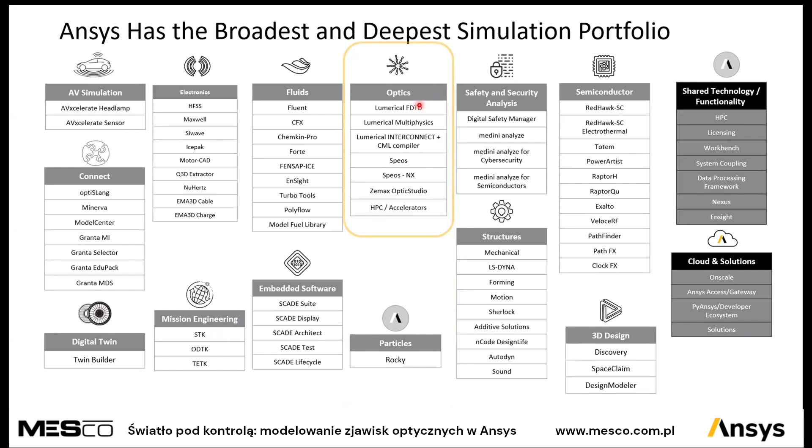But for today we stay focused on optics. We are looking at a nanoscale technology tool, an optical design tool, and a system tool, to go from nanoscale design to complete system validation in edge case use cases.

So what are now the challenges? If you are working as an optical engineer, a photonics engineer, or if you're a student starting to think about becoming an optical photonics engineer, you will have different challenges. But you also have an advantage: looking at optics, looking at photonics, this technology is everywhere.

Everywhere you're touching a product, mostly optics is inside. You can look on outer space engineering, telescopes design, daily use glasses, smartphones, rocket technologies, augmented reality glasses, medical devices, cameras, fiber coupling, sensors on industrial production lines, automotive lighting, autonomous driving, head-up displays, cockpit lights, satellite communication, microscopes, laser pointers, space observation. All the topics are needing optics, and the usage of optics photonics is increasing massively.

If you're thinking about a new job as a student, starting in optics photonics, you're welcome. The market is searching for you and needing research partners to deal with new technologies. So stay focused if you like to start your job as an optical engineer.

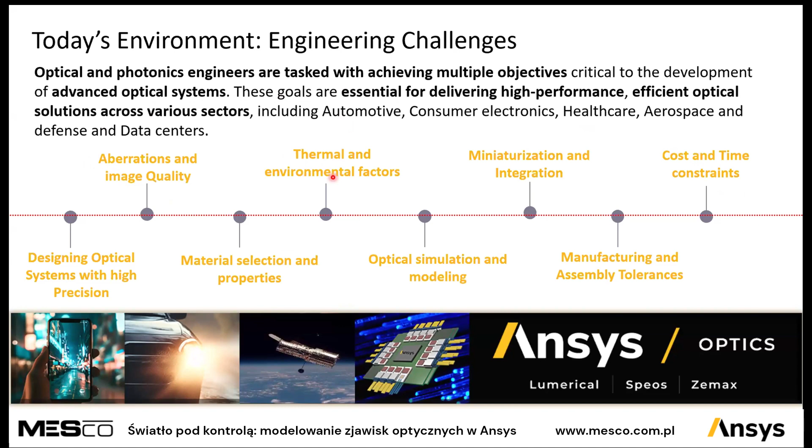For each development, the costs and timing of a new product or optimizing an existing product is mandatory to track, because a product needs to be fast on the market to increase business outcome, but it also needs to be fast and accurate. All these challenges need to respect the optical design, whether on automotive, consumer electronics, space observation, or data communication. All the technologies have the same challenges.

If you're talking about optics at Ansys, we're generally talking about a specialized wavelength spectrum, to find a separation from electromagnetics to high frequency. In optics and photonics, we are talking about infrared, visible light, and ultraviolet range, from roughly 100 nanometers up to 100 micrometers. We are talking about optics as a physics-based simulation, looking on a component. All that simulation tools can add to each other, to look at the system and measure performance of an optical design in our optical tools, working inside the systems, in virtual prototyping, in edge cases and weather conditions.

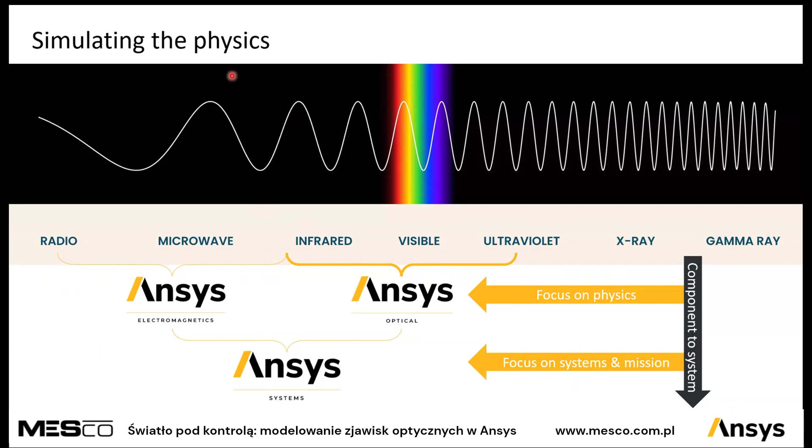Looking at the wavelength spectrum, we are providing 3 fundamental software solutions. From a first nanoscale solution called Ansys Lumerical, we are providing a photonics tool, which is using the Maxwell equation to simulate the transport and behavior of radiation with respect to the wave behavior. So, looking at light, looking at radiation, you can validate it as a particle or as a wave.

Especially if you're talking about nanoscale designs, where designs are equal to or close to the wavelengths of interest, you need to respect the wave behavior of radiation, to design nanoscale plasmonic patterns, waveguides, sensors, RGB displays for smartphones, anti-reflex coatings. For all that, we need an FDTD solver to validate specialized optical elements like diffraction. We like to detect and use these effects with such a tool. For all nanoscale technologies, we provide Ansys Lumerical.

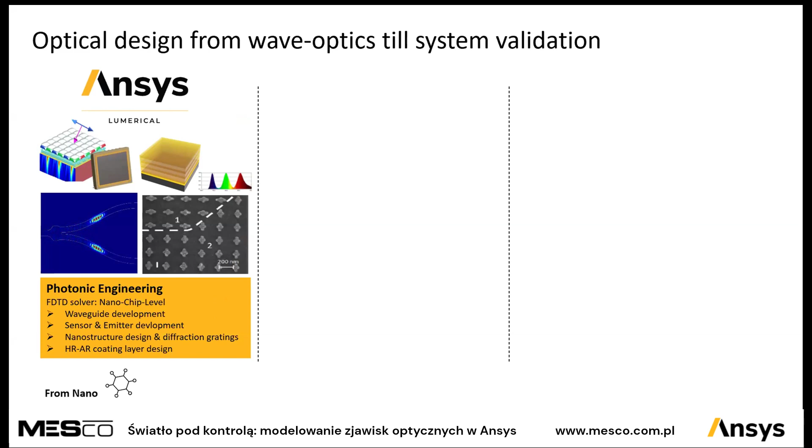Next step, from an FDTD solver to a ray tracing solver, which simulates light radiation as a vector hitting a surface, which will be absorbed, transmitted, or reflected, we provide Ansys Zemax. Ansys Zemax is a tool focused on optical design, camera lens systems, but not only the design of a simple lens, a lens stack full of freeform lenses. It's not only the design, it's also the optimization, analysis of tolerances of the lens itself, but also of the optomechanical systems, to provide a manufacturable product, a product which is good for the tooling, matching with the tooling, and providing the customer performance.

Last but not least, we have Ansys SPEOS. SPEOS is a lighting tool and system tool.

This tool is also a ray tracing solver like Zemax, looking on a particle which hits a surface, but it's focused on lighting technologies. This design of optics is a little bit more simple. We are using freeform reflectors, ellipsoid reflectors, light guides, and pillows on optics to spread the light, which is mostly used in automotive and general lighting.

The advantage of Speos is that it is also a system engineering tool. That means you can put your Ansys Lumerical information, for example in nanoscale meta lens design, into an optics design of Zemax, and in Speos we can validate the complete system, how the system works, how the sensor performance looks like under critical ambient conditions. All three fundamental solutions are able to match the needs on a component design depending on the industrial usage of our customers or the system responsibility of our customers.

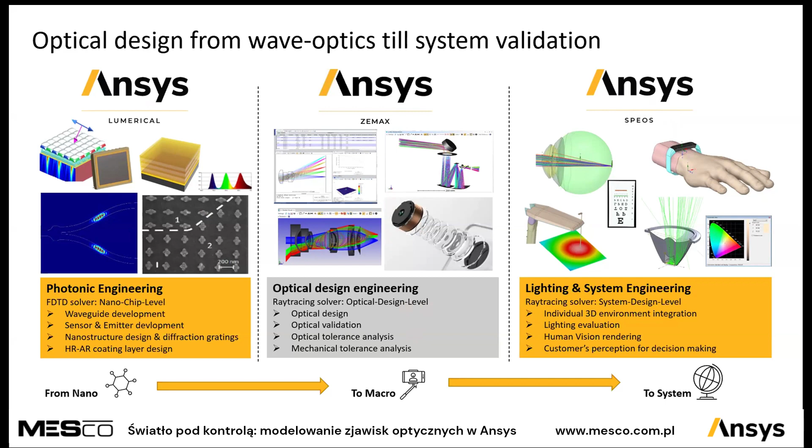That means we have a very valuable bridge we can close with our portfolio. We can build a bridge at Ansys, only at Ansys, to provide a nanoscale photonics FDTD design into a Monte Carlo ray tracing solver like Speos and Zemax. That means we can design nanoscale plasmonic patterns numerically and transfer the near field information of that simulation into our Zemax and Speos to validate how a nanoscale design has an effect on readability and contrast, for example, of a head-up display.

We can design optical coatings numerically, interference coatings, anti-reflex, high reflex. Then we can transfer the coating information as a library material into Speos and Zemax to validate the performance and look on the residual reflex by visualization.

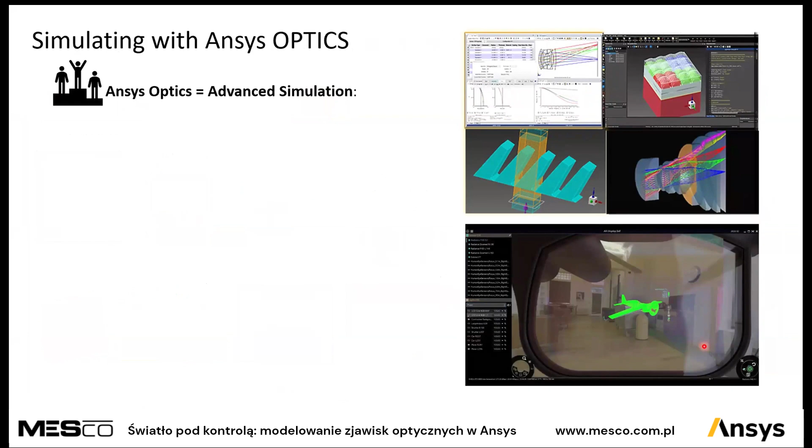So, and this is unique: this bridge between nanoscale design and macroscale designs and macroscale system validation is unique at Ansys. That means working with Ansys Optics means for each of our customers and each of their engineers using advanced simulation.

Why advanced simulation? Because we are providing multi-physics integration. We can use our Ansys Optics to predict how an optical system is working after multi-physics effects like thermal heating and mechanical stress. We can provide visualization, real physics-based visualization. That means we can predict to 99% how that product looks like and where the weakness of a product is.

We are providing GPU capability, HPC capability. Looking on complex designs, GPU, HPC, cloud systems are mandatory to decrease the simulation time to a minimum. We have a faultless data transfer, as discussed in the slide before, between FDTD solver and Monte Carlo ray tracing solver. And for sure, our Ansys Optics bundle has full integration into the complete Ansys ecosystem, to mix it with the mechanical simulation, to mix it with the fluid simulation.

So, for that portfolio, three tools for one solution: optical design, respectively photonics design. You will have, or you are knowing, different challenges, and some of them we'd like to discuss with you.

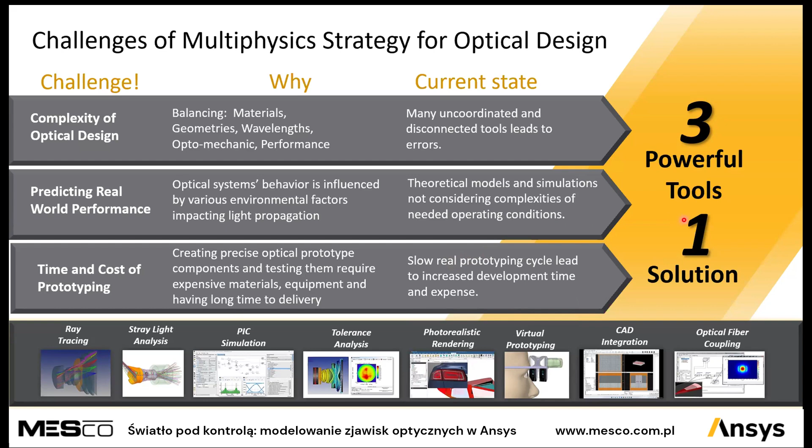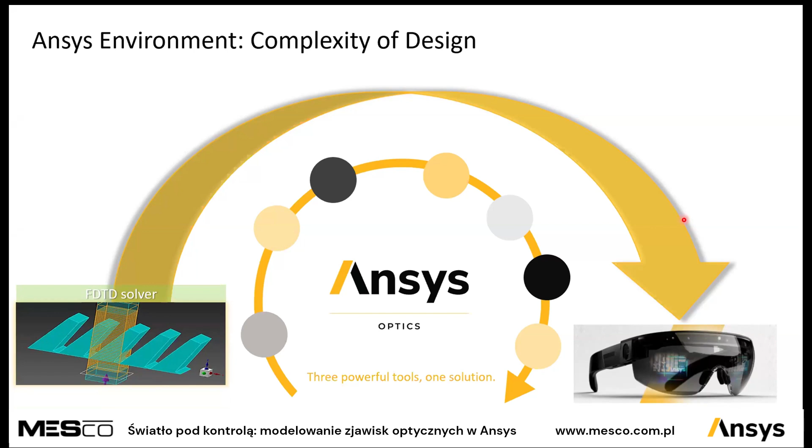By virtual prototyping, they could save a lot of money currently spent on real prototyping. Now let's take a look at the Ansys environment for design complexity. You have to balance materials and technologies. Looking at augmented reality glasses as an example, Ansys can provide the bridge from photonics to optics to multiphysics and GPU.

Designing augmented reality glasses needs nanoscale diffraction gratings, a ray tracing solver to simulate the optical projection from the camera, and multiphysics protection since AR glasses work under different scenarios and weather conditions. We can use our tools for optimization, to reduce the package size and increase performance.

We provide tools for human vision rendering, meaning you can look at the performance and validate whether the customer accepts it, how the images look from different points of view and different focal points. All of that is powered by GPU to make it quick, but also accurate and trustful.

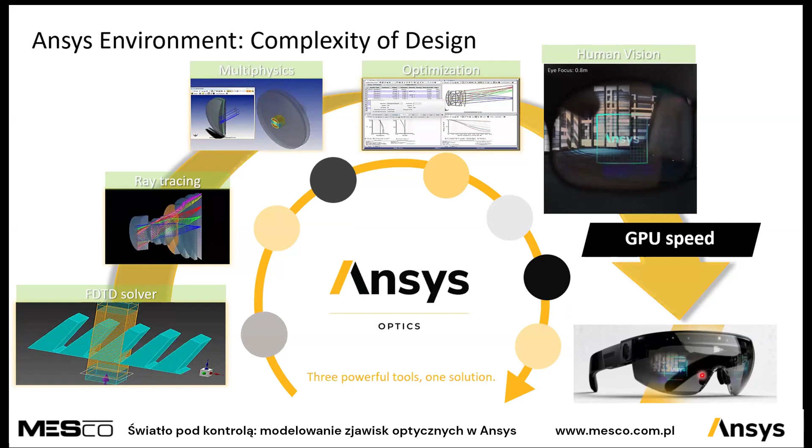Looking at prediction, our tools are used to make management decisions. For example, with BMW, we get great feedback that our solutions provide information exactly like in real life. On a management level, virtual solutions help optimize designs and predict performance under different scenarios.

This focuses on seamless light interaction, meaning modeling optical behavior from nanoscale designs to large-scale optical systems, from a new light source to a complete light guide covered by the interior.

Thermal and optomechanical modeling shows how a light guide or LED changes under heating, how color shift occurs, where hotspots and dark spots appear due to manufacturing rules, and how that looks under human eye view, respecting light-dark adjustment, accommodation, and glare effects of different observer ages.

How the product looks for a 24-year-old versus a 65-year-old lady - all of that can be rendered based on real physics by our solutions.

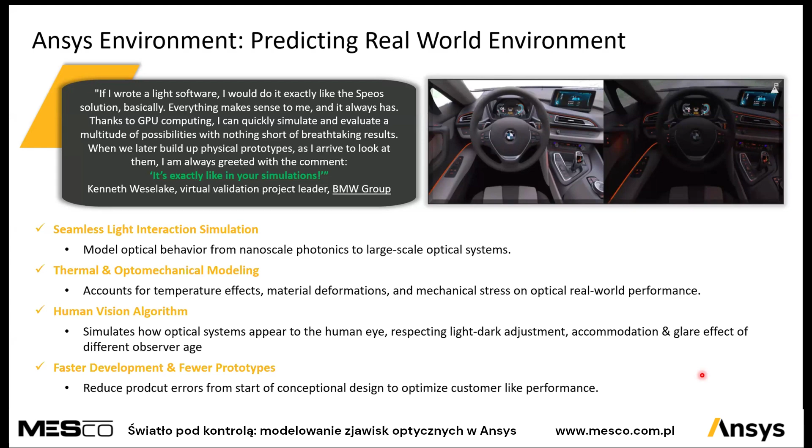This virtual rendering helps our customers reduce prototyping costs and move faster in development. Here you see some examples.

On the left side, you see an airplane cabin lighting perception, used to validate customer feelings about light color and light distribution, and whether customers like it under different scenarios like day flight or night flight. You can play with materials and seat colors to validate the best performance, matching on both performance and quality.

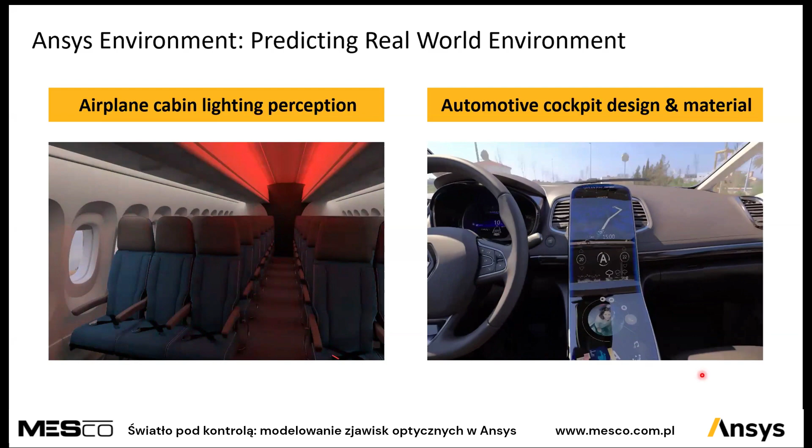On the right side, automotive cockpit designs: where should the display be placed, what effect does the sun have on display readability, what is the quality of the light guide from different viewpoints, what's the effect of interior cockpit materials and colors, and what is the windshield reflection? All of that can be covered by optics solutions.

On time and cost of prototyping, the Ansys environment provides a complete, faultless transfer of technologies between FDTD - nanoscale FDTD solver - to macro-scale ray tracing solver. We allow our customers to make design variations quickly and accurately.

With virtual prototyping, we can test each design under edge case scenarios described in the RFQ, for example weather condition, sun condition, temperature, pressure. That means with Ansys Optics, we deliver the most efficient way of virtual prototyping.

We allow our customers, especially on unique new product designs, to stay fastest on the market. These are key drivers we care about - making you successful with your products on your market.

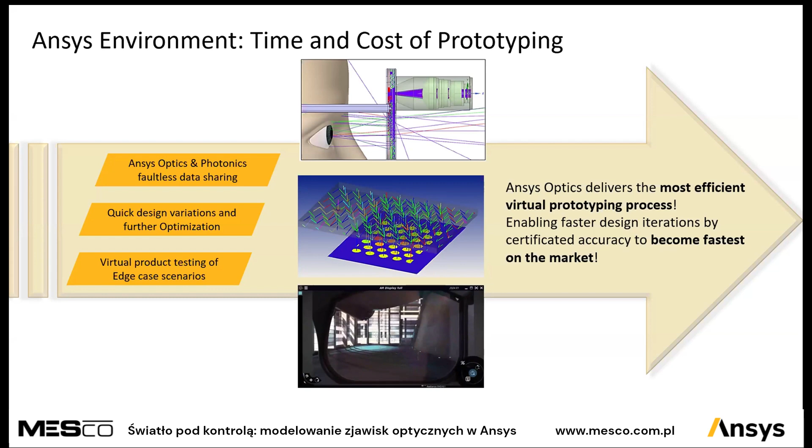So now let's take a deeper look into our software solutions. You know Lumerical, you know Zemax, you know Speos. What is Lumerical? As mentioned, Lumerical is a photonics design tool focused on nanoscale applications, not only component design but also nanoscale multiphysics design.

Quantum efficiency, for example, is important for solar cells - how efficiently a photon is converted into an electron.

All that stuff on a nanoscaled design is solved by Lumerical.

Our key users from industry sites are aerospace and defense, automotive, communication, consumer electronics, and healthcare. We are talking mainly with our customers about co-packaging, data communication, photonic integrated circuits, augmented reality, and smartphone technologies. To reach all these applications and industries, Lumerical is split into different modules, which we like to discuss with you based on your needs and your motivation and vision.

We have the Ansys Lumerical FDTD as a fundamental package to design sensors, nanoscale patterns, or coatings. We have the Ansys Lumerical MODE, which is focused on waveguide designs. We have the photonics integrated circuit tool called Ansys Lumerical INTERCONNECT to design photonic integrated circuits provided by several foundries.

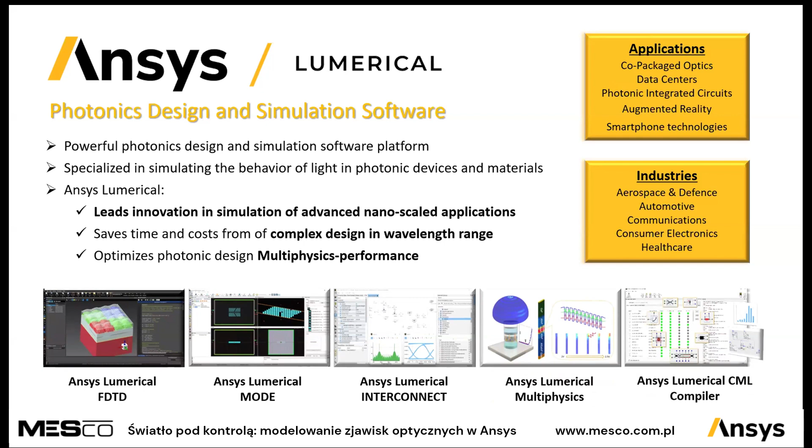So if you're looking at the photonics landscape, you also will touch specialized challenges. One challenge is the balancing of component design and the system level for photonic integrated circuits on a multiphysics level. And the ideal solution for such a challenge will be the advanced simulation chain.

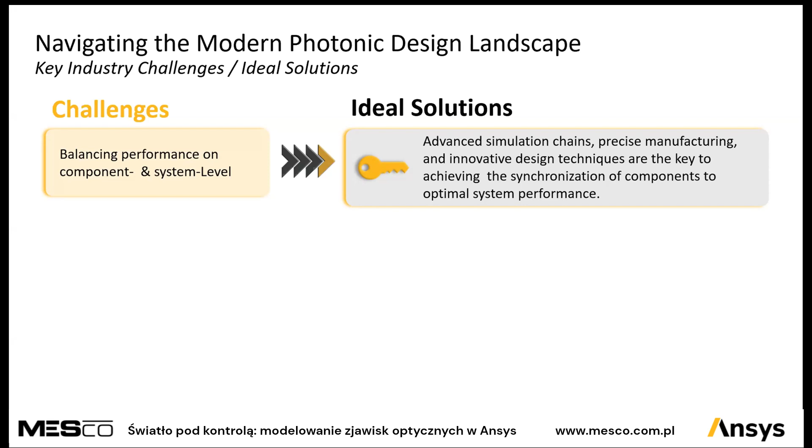It needs to respect precise manufacturing and innovative design techniques inside the software to achieve the synchronization of a single component and its integration into a photonics system. Also, specialized designs with millions of meshings need a long and computationally extensive simulation.

An ideal solution will be HPC, GPU, and model simplification to decrease the simulation time but stay accurate and trustful in the simulation results. And last but not least, intellectual property, especially on the nanoscale level.

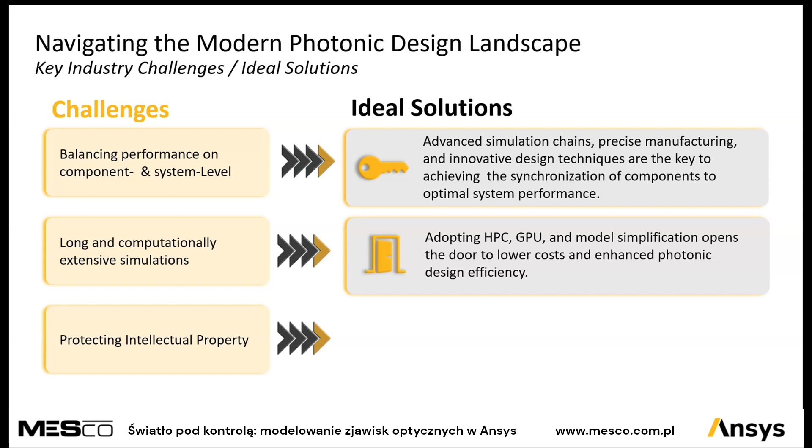A lot of new technologies like quantum computing and quantum communication are key drivers and need to become protected for your internal intellectual property. That means software needs key security features like data encryption, version control, and watermarking.

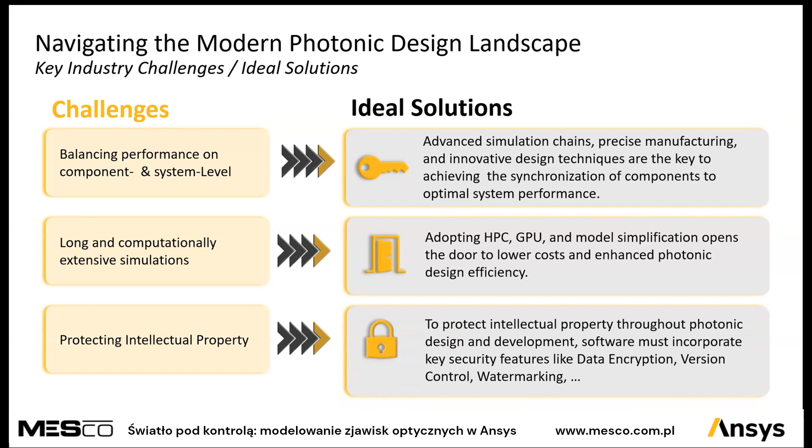These challenges on the photonics level can be solved by Lumerical. Looking at balancing component and system level, Ansys Lumerical optimizes component and system performance from integrated component simulation to multiphysics efficiency. That helps to minimize design iterations, reducing your resource waste and limiting performance degradation.

Looking at computationally extensive simulation, Ansys Lumerical's FDTD module provides GPU capability, and all Lumerical tools can run on cloud platforms and cloud clusters. That means with the help of such GPU and HPC cloud systems, we can speed up the simulation of long or high meshing designs while keeping the accuracy.

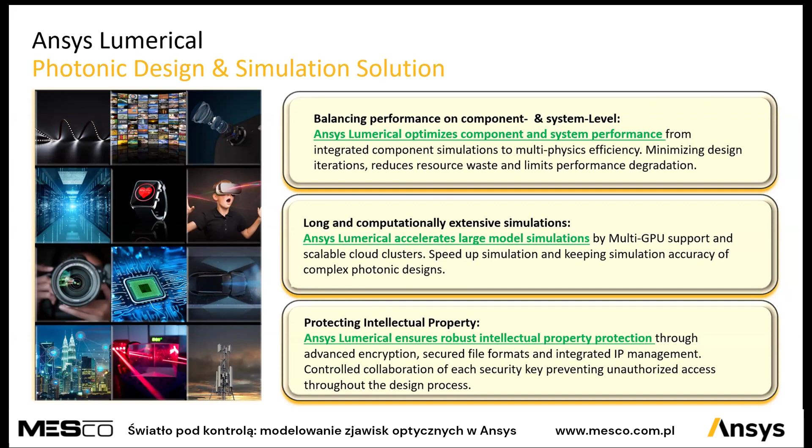That is mandatory. Speed is one side of the medal, but keeping the accuracy and trustful design validation needs to be respected also. And to protect your intellectual property, Ansys allows secure data formats and is integrated into IP management, which allows you to control all of these key security features to prevent unauthorized access during the design processes. You are protected, you are fast, you are balanced.

So, a key driver—for example, quantum technologies—is a key driver in photonics. For example, looking at quantum communication, this means protected, confidential communication technology to protect against decryption. It's very focused on government communication, military communication, police communication, which needs to be synchronized between satellites, ground stations, or synchronized with fiber couplings.

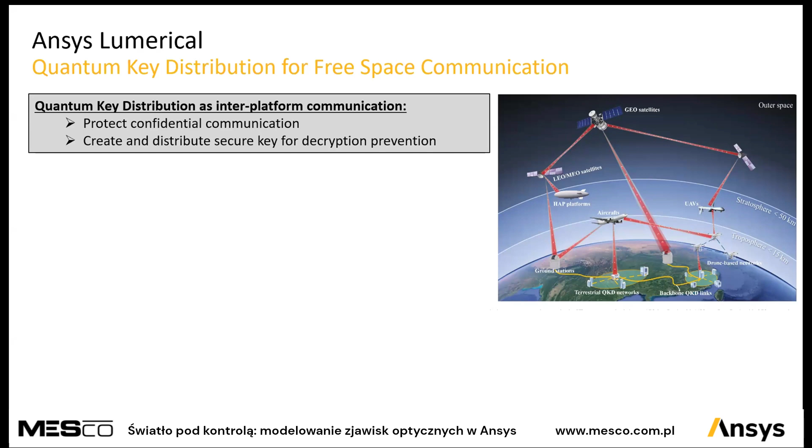This technology needs a lot of photonics devices, like photon sources, phase shifters, beam splitters, resonant filters, and Mach-Zehnder interferometers. All of this can be designed, synchronized, and validated inside our Lumerical software.

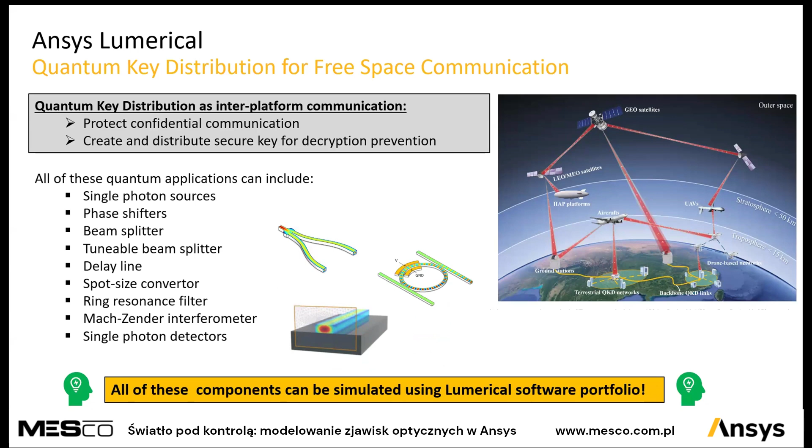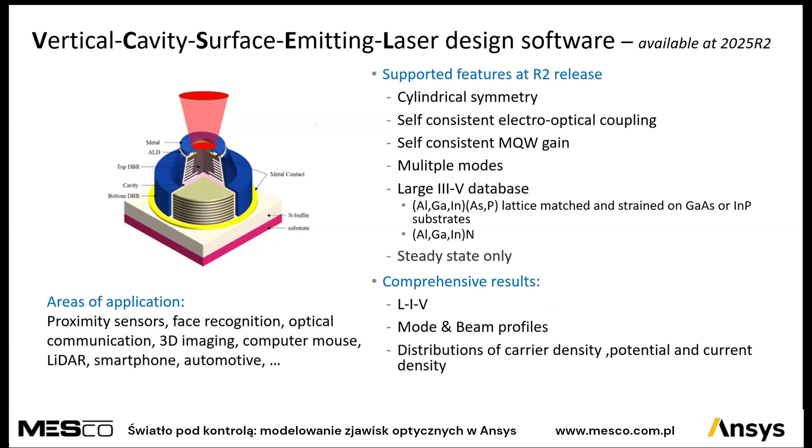And we are very proud to introduce you to this. Over the next releases, we are planning to release a new feature focused on vertical cavity surface emitting laser designs, so-called VCSELs, which are mandatory for quantum computing and sensing. This new feature is planned for the next releases. If you'd like to be introduced to those new plans, reach out to MESCO—we are looking forward to discussing with you. What is Ansys Zemax?

Now we are switching from the FDTD solver to the ray tracing solver. We are providing Ansys Zemax, known as an optical tool, looking at optical performance and optical design. This can be sequential and non-sequential simulation. Zemax provides from the first package the non-sequential simulation, for example, for tail light analysis. It allows you to optimize the optical performance and helps you understand lens and optomechanical tolerances related to manufacturing processes.

Our key industry customers come from aerospace and defense, consumer electronics, healthcare, and automotive, and they focus on, for example, endoscopes, telescopes, satellites, cameras, displays, LiDAR, augmented reality glasses, and laser technologies. For these applications and industries, we mainly provide Zemax OpticStudio, because it's a trustful optical design tool focused on high precision optical systems.

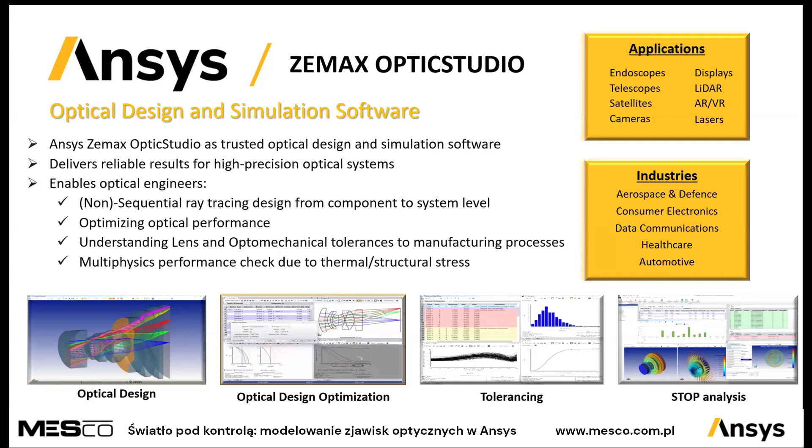Looking at optical design in Ansys, there are typical landscape challenges. The first is accurate simulation for high precision systems. We need advanced software algorithms combined in a trustful design and analysis tool to deliver accurate optical component and system information that you know you can trust for reality.

You also need to respect that your lens design has to be put into an optomechanical system. A lens system without an optomechanical tube is hanging in the air, let's say, and this needs to be synchronized. For that, a faultless interoperability of multiphysics tools is needed to characterize and minimize the effects of stress, deformation, and heating on that optomechanical system.

Last but not least, manufacturing. If you're designing an optical lens system, you need to respect the tooling rules of your own machines and of your supplier's machines. You can design a lens system, but if you're not reaching the tolerances of the toolings, this system will crash and be stuck on the market. You need to respect and understand how to reach it.

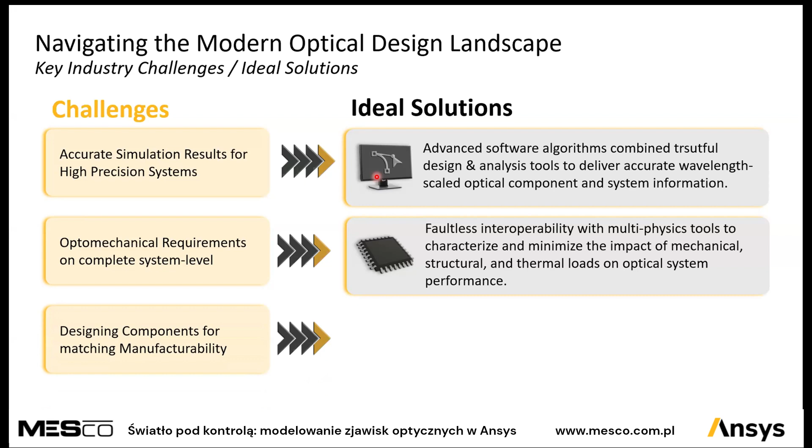For that, a tool is needed which includes the manufacturing and assembly parameters for easy-to-use evaluation, to detect design compromises and ensure during manufacturing that you keep high optical performance, and to see if a freeform lens design or a lens stack with lower tolerance provides the better compromise between cost and performance.

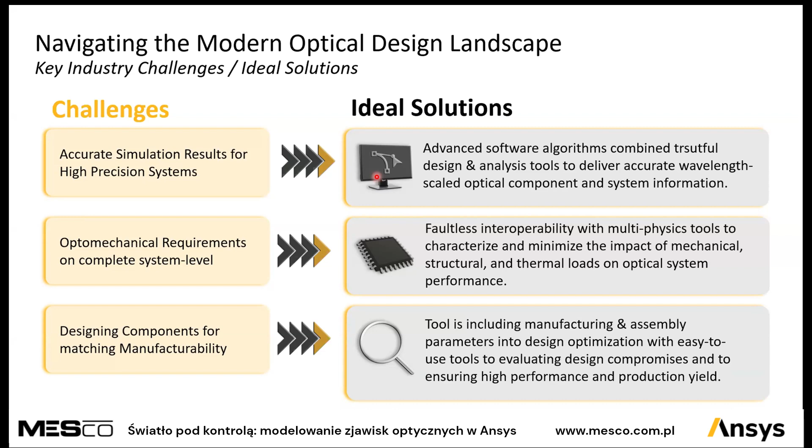And for that, Ansys is providing the solution. Looking at accurate simulation for high precision systems, we provide measurement tools to validate PSF, MTF, and image simulation, from ray tracing to analysis.

Looking at optomechanical requirements, to put the lens system inside an optomechanical system and validate it against a critical environment, we allow STOP analysis provided by the Ansys STAR module, to optimize the optical package performance by respecting structural and thermal effects, staying focused on optical performance while giving you the chance to reduce package costs.

Understanding the package, optimizing the package against performance, and balancing against costs—this is what the STAR module provides on a multi-physics level.

And then manufacturing: Ansys Zemax provides an optimization tool for lens design and optomechanical tolerance analysis. This capability enables high quality, cost-efficient design to avoid expensive delays, failures, and customer dislike. Knowing the performance and the tolerances, you are able to start the button of production.

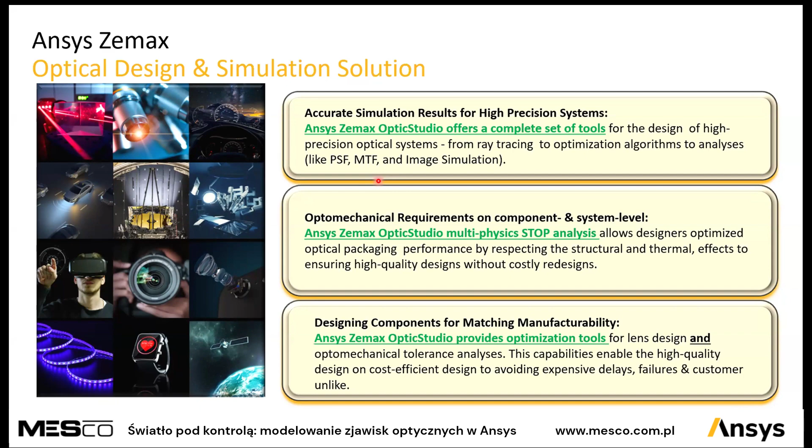For that, Ansys Zemax is split into three different packages. We like to discuss with you based on your needs and motivation to use it. We have Ansys Zemax Pro, coming with 4 instances, providing complete optical design tools to simulate polarization, ray splitting, scattering, physical optics propagation, spherical, aspherical, and freeform lens design. The general usage of optical design is completely covered by the Zemax Pro package.

If you like to become more precise in validation and design, for example of freeform lenses, providing true freeform design with more than 2,000 test points, or if you like to synchronize to Autodesk or PTC Creo, you can use Ansys Zemax Premium. This comes with 8 instances, meaning you can work on 8 windows in parallel with one seat, focused on a subsystem level.

If you're focused on full multi-physics design, looking at freeform technologies and thermal effects from structural deformation caused by heating or absorption, you use Zemax Enterprise, which releases the complete capability of Zemax, including Premium and the STAR module, and allows complete multi-physics validation since it's directly linked to Ansys Mechanical, Ansys Fluent, or third-party tools. We provide all these packages on Zemax, and we like to discuss with you based on your needs and motivation.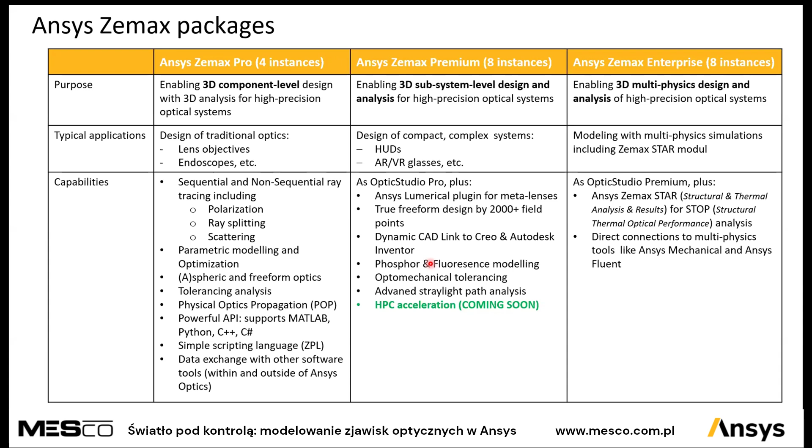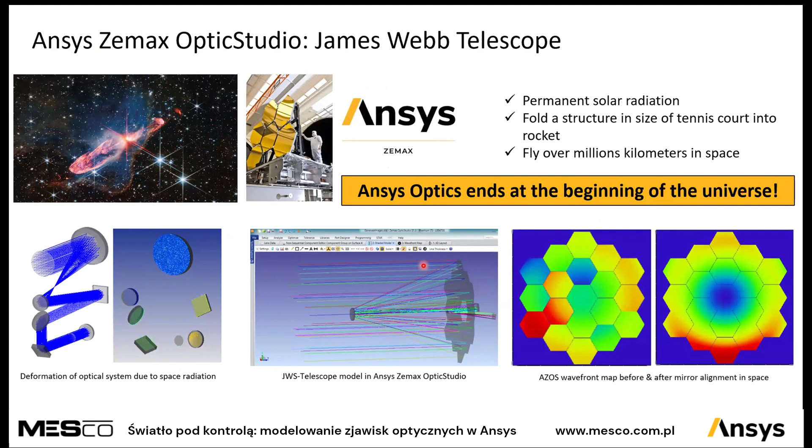Success story on Zemax: the James Webb Telescope. The James Webb Telescope, which is now providing deep space pictures, high imaging deep space pictures, was designed and validated using Ansys Zemax. Now looking at Ansys Speos as a lighting tool.

This is focused on lighting technologies and system validation. You have a CAD integrated tool, a complete virtual laboratory to measure flux, candela, luminous intensity, illuminance. You can set weather conditions, and it provides decision making. It's focused on automotive, consumer electronics, and general lighting. We can design displays, and we can validate lidars.

We can validate optical sensors. We can make human vision rendering. We can design street lighting, indoor lighting, and validate sensor view at night, at day, during fog, during snow. All that stuff we are providing with Ansys Speos.

We also have challenges here, generally we have to predict design performance. An ideal solution looks like a synchronization of several multi-physics simulation tools for trustful design and quick validation of the designs against external and internal standards like ECE or SAE for automotive. We have the balancing of aesthetic and function, meaning cost and product quality.

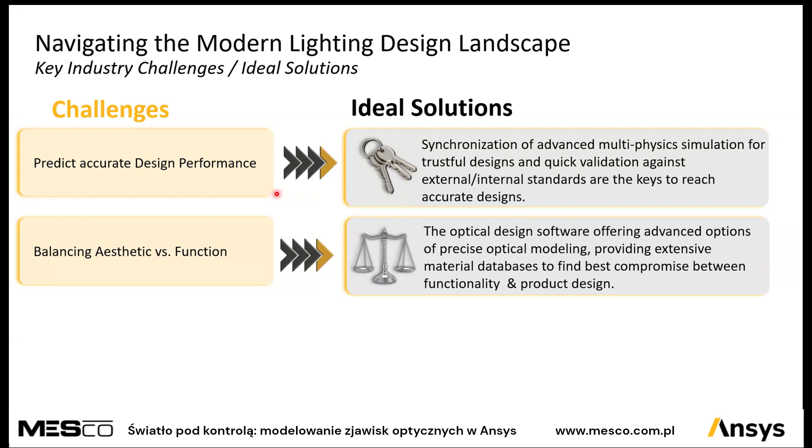An ideal solution is an optical design software offering advanced options for precise optical modeling, providing extensive material libraries inside the software to find the best compromise between functionality and product design.

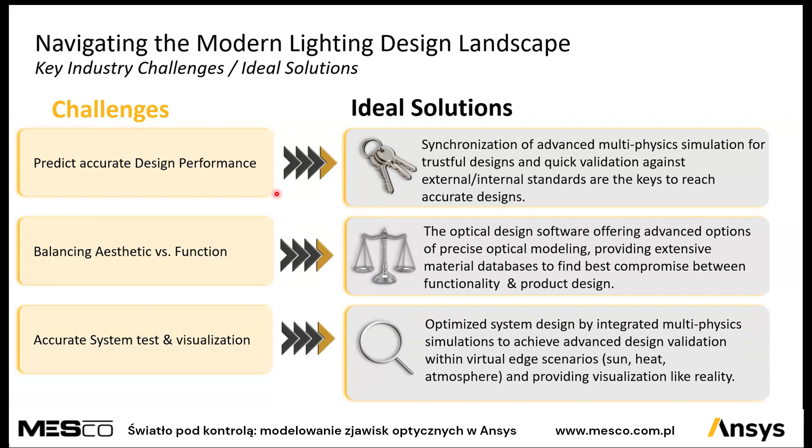Looking at system tests and visualization, an ideal solution needs to be integrated with multi-physics simulation to achieve advanced design validations within the virtual edge case scenarios the product has to reach, looking at sun conditions, heat conditions, atmospheric conditions, weather conditions, and sky atmosphere conditions that Modtran provides to make a visualization like in reality.

And also here, Ansys Speos has a solution. On optical design, accurate design performance, Ansys Speos provides precise vision modeling, enables improving product accuracy, reducing development costs, saving engineering time, and accelerating the economical time to market by meeting performance and visual product quality.

Looking at balancing aesthetics against functionality, Ansys Speos helps designers balance technical design conflicts with extensive design and measurement tools included in the software from the first package.

For modeling and virtual testing, the advanced multi-physics simulation means Speos enables the reduction of redesigns, several loops to make a redesign, a revalidation of a failed design, and ensuring both aesthetic and technical goals.

On visualization, Ansys Speos provides an integrated simulation tool certified for human vision, respecting the human eye modeling, and finding the connection to ambient conditions to reduce project time on development and save re-prototyping costs while design is reached virtually in the edge case scenarios.

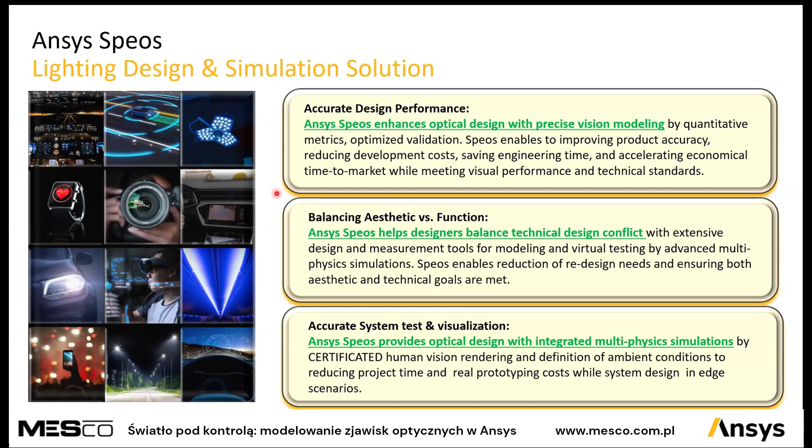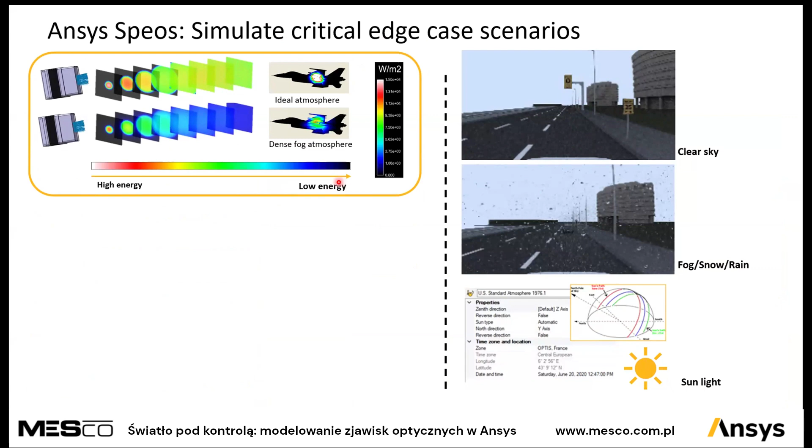So in Ansys Speos we are able to simulate weather conditions, clear sky, fog. We are able to simulate sunlight, meaning we can separate light distribution on different atmosphere conditions, how a laser beam propagates through a clear sky or a dense fog atmosphere. And Speos is able to synchronize and link to Modtran for atmospheric conditions up to 100 kilometers.

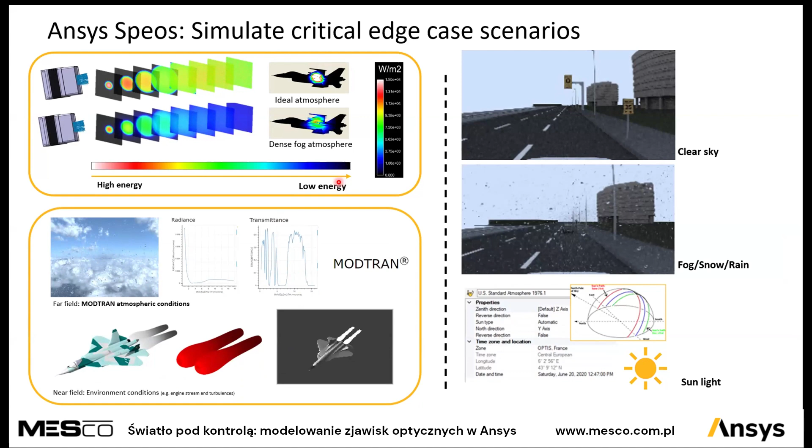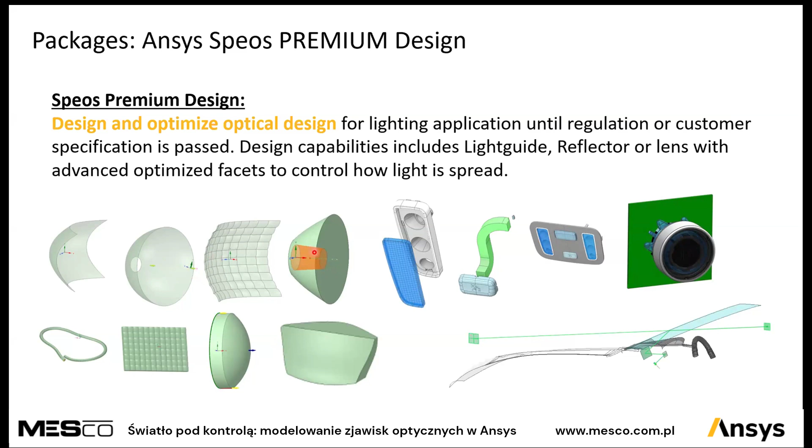We're providing the Ansys Speos Premium Design. If you're looking at optical design, especially general lighting, automotive lighting, reflectors, collimators, light guides, pillow optics, we are providing the Ansys premium design tool.

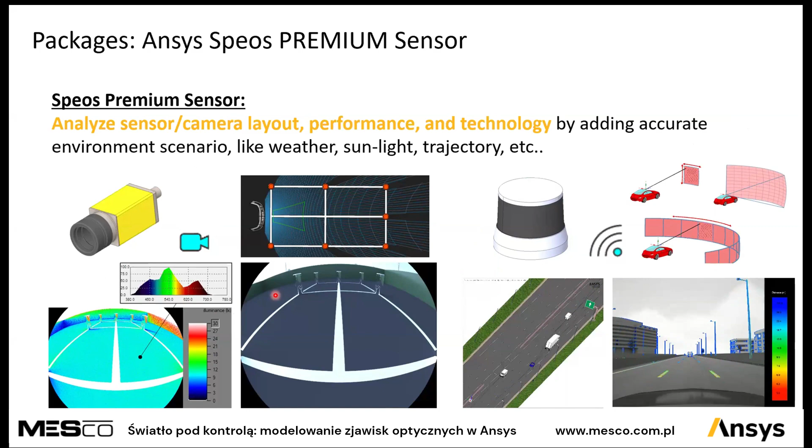If you are focused on sensor technologies, Ansys Speos allows the so-called performance and layout check and synchronization of a camera system, LiDAR system under different weather conditions, looking at static, rotation, and 3D scanning of LiDAR systems. We are providing a specialized tool for decision-making on human vision rendering.

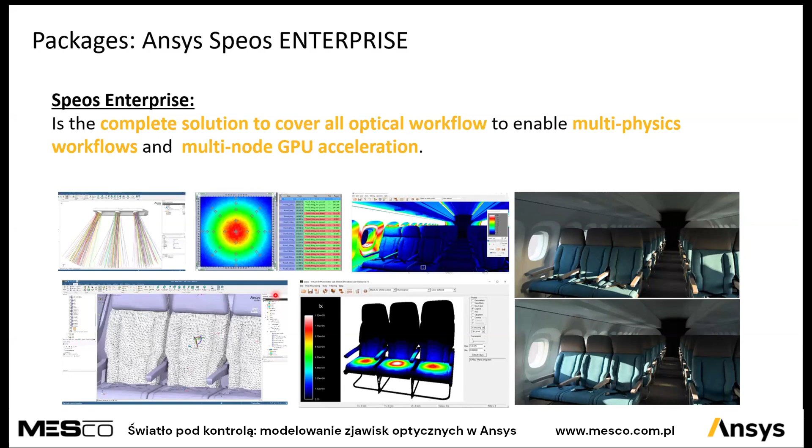And for sure, we are providing a so-called Ansys Speos Enterprise solution, which includes all features, all functionalities as an all-in solution. Looking at Thermal Desktop, it is a tool focused on fluid and thermal radiation problems.

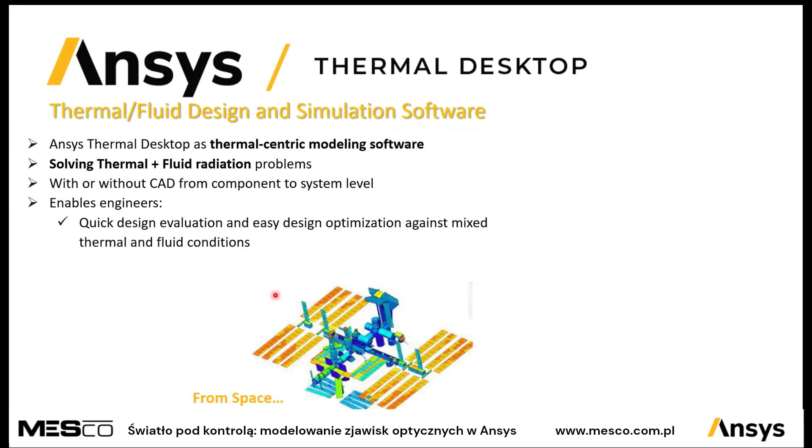This tool provides quick design evaluation and easy design optimization against a mix of thermal and fluid conditions, mostly focused on space, but also able to set such thermal fluid condition simulation for battery management, thermal optical design, heat exchanger, rocket launch, and fluid tank simulation.

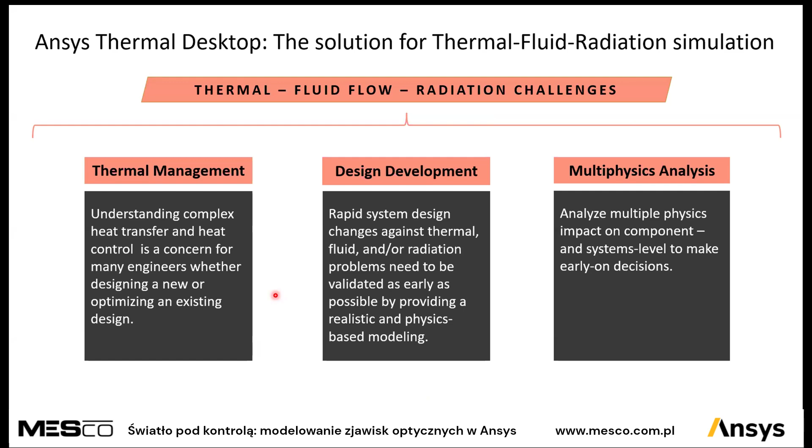We also have some challenges: thermal management, understanding the complexity of heat transfer and heat control. We have design development challenges against quick design updates for thermal, fluid, and radiation problems. And we have the need at the multi-physics level to analyze multiple physics impacts on a component and system level to make early decisions. Here Ansys Thermal Desktop provides solutions.

We have a very easy handling interface. We can simulate the heat transfer. We can simulate thermal radiation and fluid flow.

For design development, we are providing the complete built-in measures, including local mesh control, and helping to identify viable designs by rapid model changes inside Thermal Desktop for what-if scenarios. And on the multi-physics level, Thermal Desktop can be linked to our Ansys Mechanical, linked to our Fluent and STK for digital mission engineering.

For example, if you have a satellite and you need to know if all the electrical components need a thermal control system, and how that thermal control system works in space, you use Thermal Desktop, because with Thermal Desktop you can predict the satellite behavior during the mission, including typical thermostatic heaters, thermoelectric coolers, insulation and heat pipes.

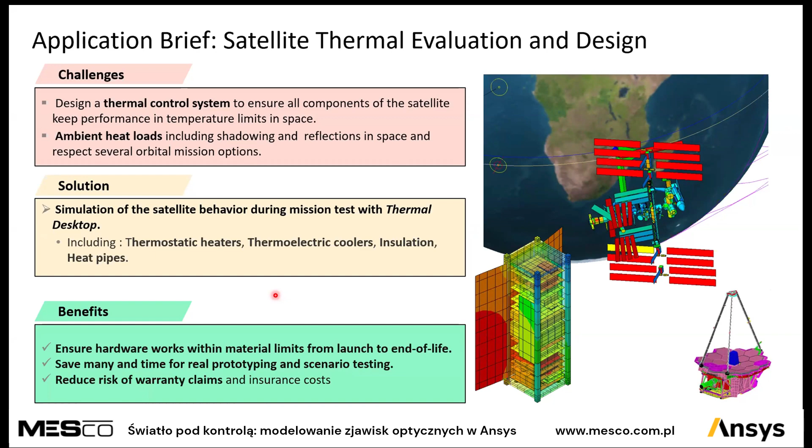The benefit of such a tool is that you can virtually ensure your hardware works within material limits from launch to end of life of the satellite. This saves money, saves time on real prototyping, and importantly reduces the risk of warranty claims and insurance costs for our customers.

Looking at automation, we provide a tool for robust, autonomous, automatic overnight sensitivity analysis. If you have a complex design needing specialized product quality, you can use Ansys optiSLang to understand the design space of your design, optimize the performance, and know how robust and sensitive each parameter inside your system is.

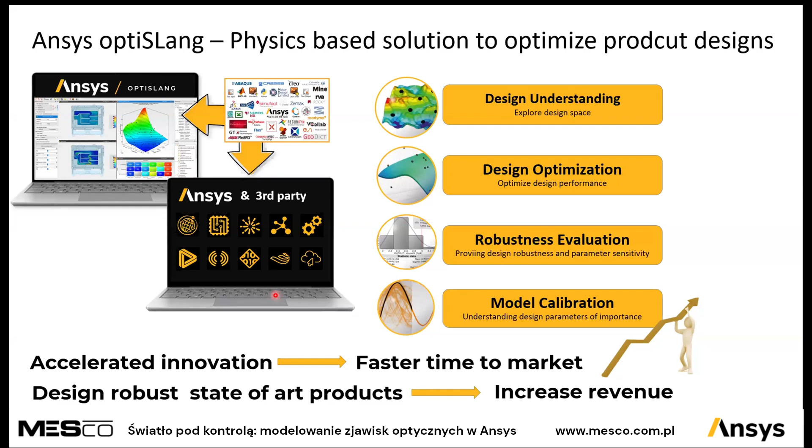This helps you understand the design parameters of importance through overnight simulation. OptiSLang can be linked to Ansys tools, third-party tools, Excel, SAP, Abaqus, Creo. All simulations are independent in usage, including optiSLang, helping to accelerate innovation. Faster development means faster time to market, increased revenue through a robust design via virtual simulation, and unique, robust quality increases the revenue for the product.

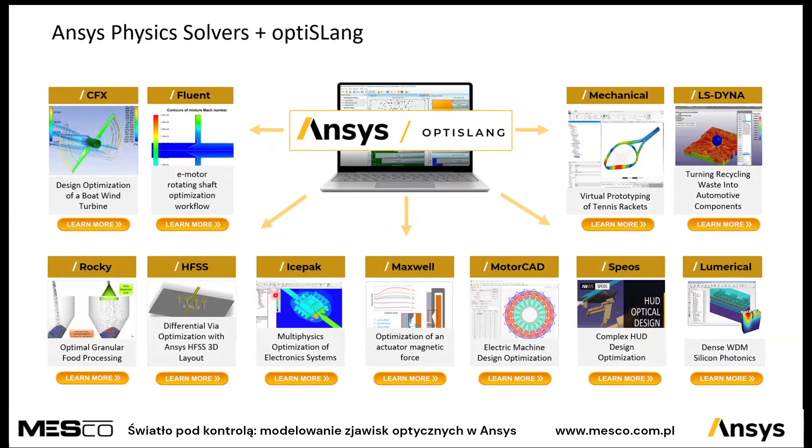All these optiSLang links can be synchronized with the complete portfolio: CFX, Fluent, HFSS, Speos, Lumerical, and Zemax.

For example, if you're designing an automotive light guide for door lighting or cockpit lighting, you set the first light guide, the spline, the geometry, the dimensioning. You set the first parameters, take the light guide, and run optiSLang, which automatically overnight finds the best parameters under robust and sensitivity analysis, and it's done.

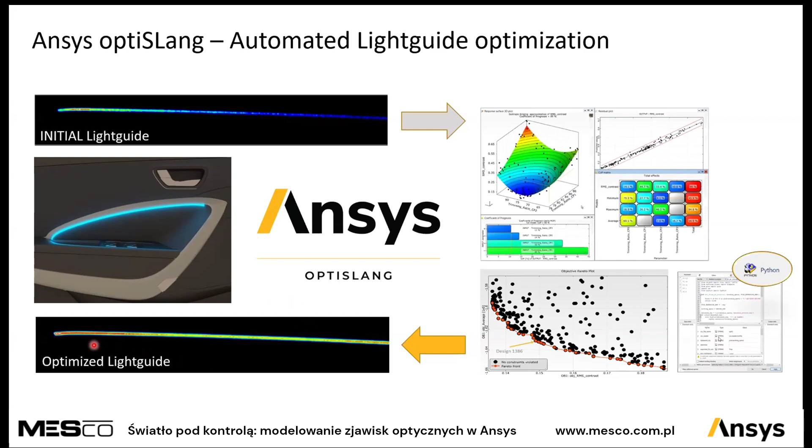This helps increase product quality and decrease development time on critical, long, complex designs which use a lot of different parameters.

Now knowing our portfolio and what we can do with it, let's take a quick look at how Ansys multiphysics is used on a satellite mission to design and validate under that space environment. We have our space, we like to start a rocket, we like to bring a satellite for observation into space, and we need to know how it works.

You start with a nominal design of an optical system, which can be synchronized and put inside the so-called standardized CubeSat technology.

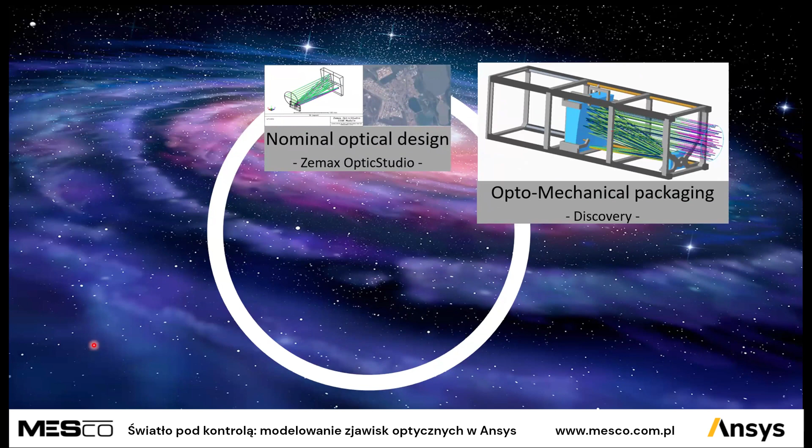If the nominal optical design is done in Zemax, you put it into the optomechanical packaging, covered by Discovery. You set the mission of the satellite you have to achieve, or different missions it has to achieve. You know your optomechanical system, and you know your mission.

You can validate the thermal radiation coming from space, hitting the materials and being absorbed by them, doing the simulation with Thermal Desktop to understand how much radiation is absorbed on each material and the thermal modeling. You can make an FEM analysis of how this radiation causes deformation or stress on the material, and how that stress affects the optical performance, going from a nominal design under mission conditions to how it looks in real life.

And if the system is now crashing, you're safe: you detect this failure from a conceptual life cycle stage. You can think about optimizing the mechanical packaging and materials to avoid the weakness of a product in real life, through a complete virtual loop with Ansys solutions.

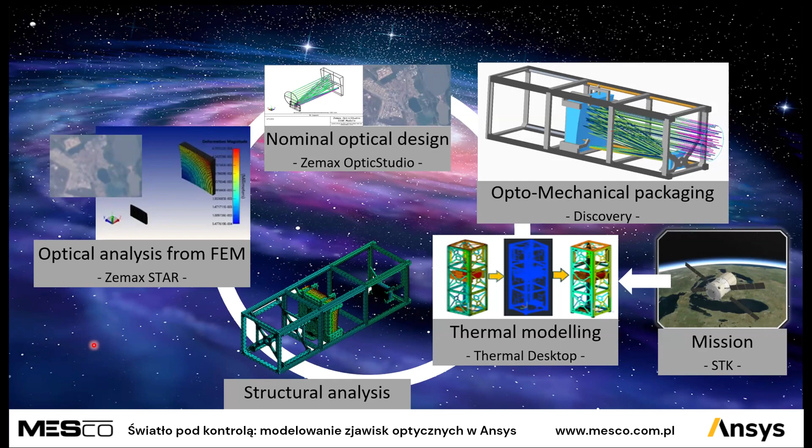This is now a good stage to hand over to Scanway, because Scanway is our very important, trustful customer, working with Ansys on such satellite missions together with Ansys and Mesco for many years.

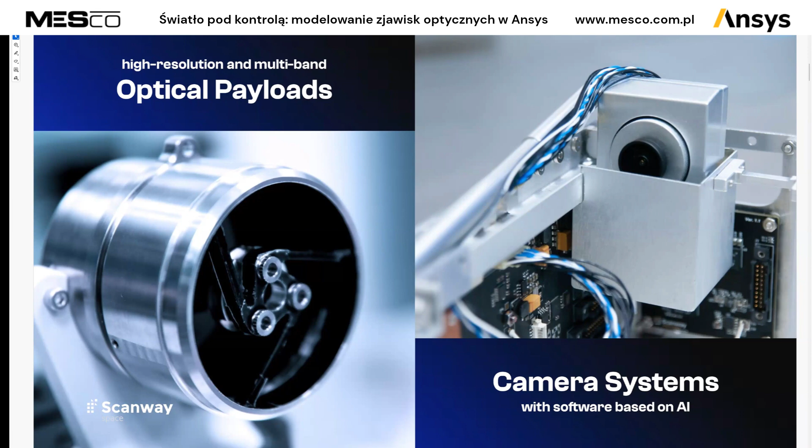We started with our R&D developments, but right now we have 6 payloads that are or have been in space. 3 payloads are awaiting launch with our customers, and 10 payloads are under delivery at different stages of development.

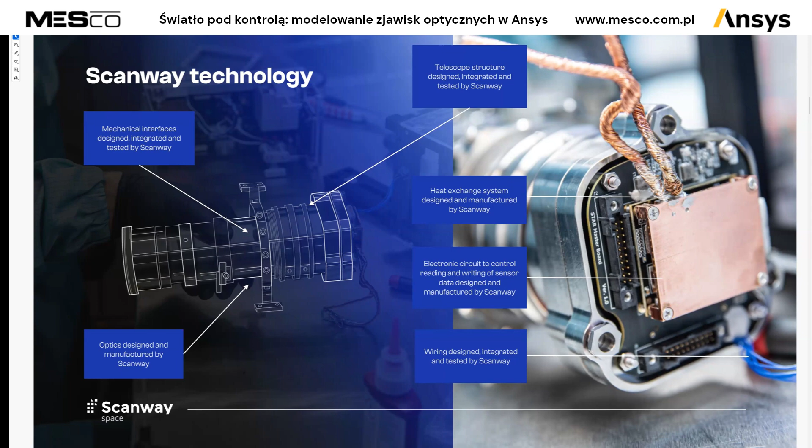Our technology is mostly concentrated on developing optomechanical systems, so telescopes, but also as a part of the whole assembly, we're developing cameras as well as thermal management systems. Most of our telescopes currently have active thermal control to keep the operating point around a certain temperature, which Ansys and Zemax especially help us to develop and optimize.

A few examples of the products we developed or are developing: the SOP 3U50. This was our first mission that we sent into space in 2023 - basically our in-orbit demonstrator. This was a small telescope with a resolution of about 25 meters per pixel. This was a mission founded to test our solution and provide our customers with confidence that we can reach orbit without any problems and provide a functioning payload in a small envelope.

Last year, we sent into space a bit bigger telescope. It's called SOP 200 and was part of an Eagle Eye mission that we did together with Creotech Instruments and CBK. It was a 1.75 GSD telescope, mostly made of carbon fiber and aluminum. This was also a nice piece of optimization that we did on both optical level and mechanical level for this to be as thermally stable as possible in a very specific environment of the satellite platform.

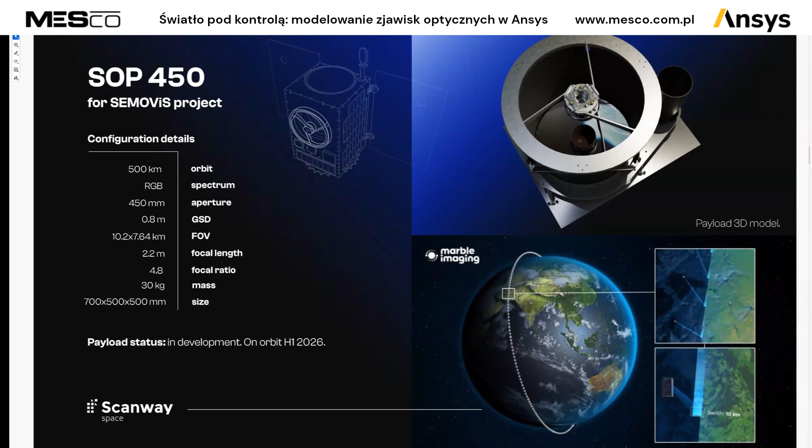Right now, we're scaling up the solution and developing a 450 millimeter aperture telescope that will provide resolutions lower than 1 meter. So we're talking about VHR payloads, and this is a project that we're doing under the supervision of the European Space Agency. But this was basically an overview of what we are doing and what is the end goal.

Let's switch to how we are doing this, and what steps we are taking for our payloads to function properly in the challenging environment of space. David explained some initial points that are main points we have to take under consideration when developing optical systems for space. But there are basically two crucial aspects that we have to address.

One is the delivery to space - the overall launch on the rocket, which is a quite bumpy ride when it comes to mechanical requirements and mechanical stability, because we have to deliver the payload to orbit without any of the crucial optical parts moving towards each other, and without the system breaking the mechanical elements or the optical elements.

The second one is operation in orbit - the lack of atmosphere, which is a stabilizing agent for the whole system, high thermal radiative fluxes, and conduction through the satellite platform. These are the environment parameters that we have to cope with, especially considering the orbital parameters of the system.

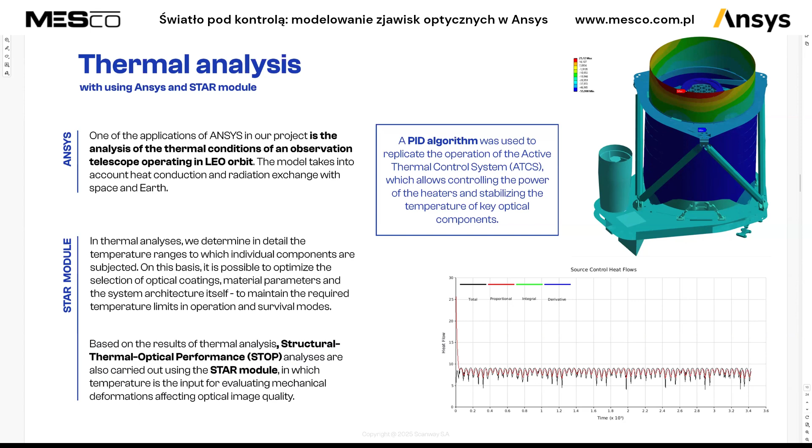Also, Ansys helps us to assess where we have to place temperature probes and also heating elements.

One of the, apart from Zemax, but in the mechanical module of Ansys, we are using modal analysis to optimize the structure for the launch of the rocket. Most launch vehicles require us to have the lowest natural frequency of the system above 120 Hertz, and Ansys allows us to analyze it and optimize the structure for that.

Next is random vibrations. As I said, rocket launches are bumpy rides, and we have to be certain that during the whole process nothing breaks. Random vibration analysis allows us to assess if our current design is on the safe side from mechanical stresses. If not, we try to iterate and develop a structure that will have no problems during rocket launches.

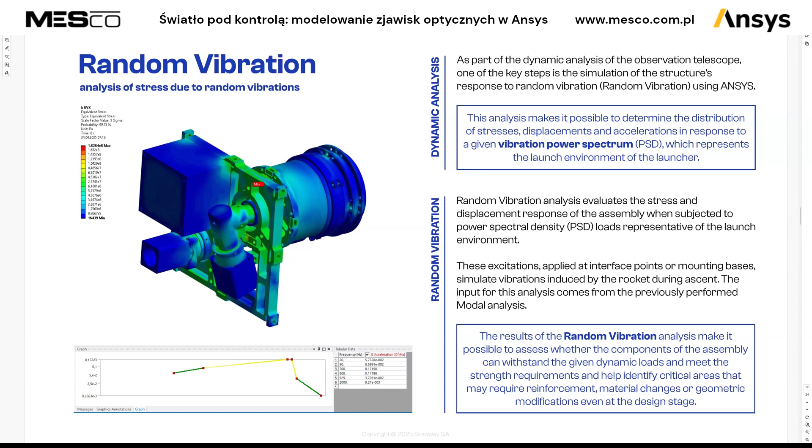Static structural analysis allows us to also analyze the whole structure when it comes to certain G values that come into play when considering rocket launches. The acceleration of the rocket is quite significant, and this has to be taken into account when designing,

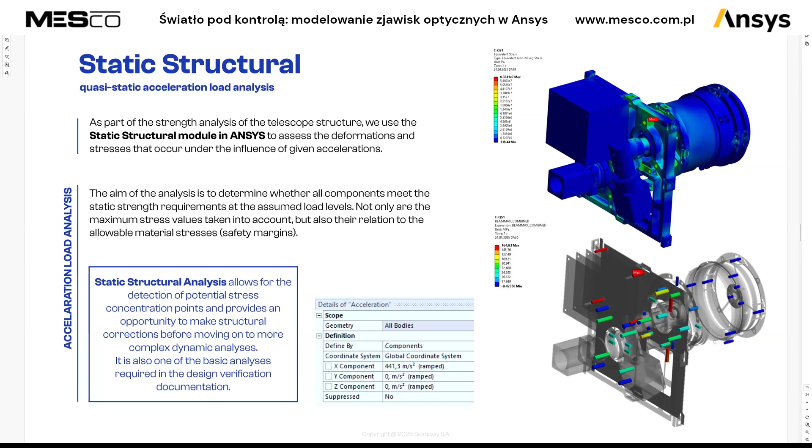especially large telescopes with large primary mirrors. Static structural analysis from Ansys, we have a lot of large optical elements and mechanical elements in our designs, and we have to ensure that they won't break under stress induced by rocket launch or temperatures varying during in-orbit operation. That's why we try to simulate the static conditions and see if any stresses don't exceed the safety margins.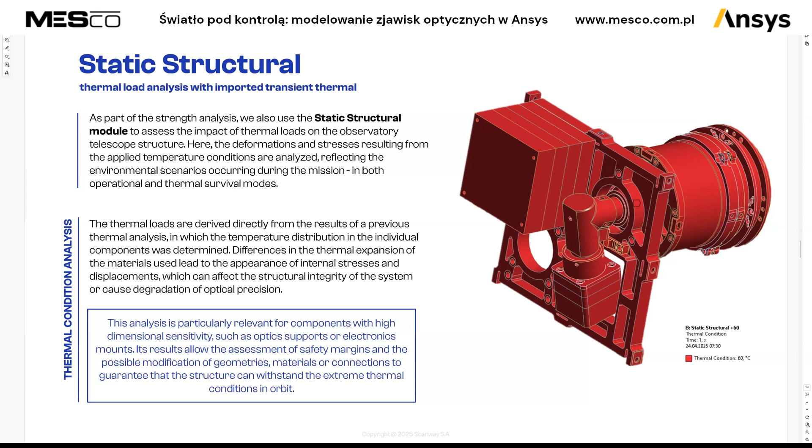For example, in lens assemblies, if the lenses will survive the day and night during orbit.

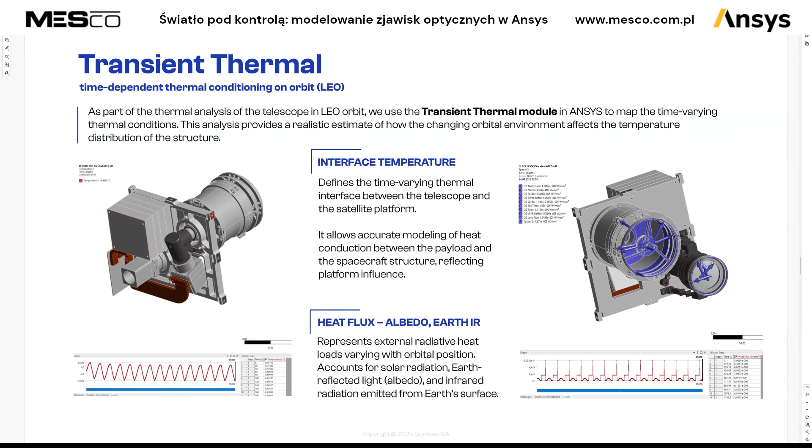One of the biggest hurdles that we have to address when designing optical assemblies - optical telescopes that work in orbital conditions - are transient temperatures, either from radiation from Earth and Sun, or radiating heat from the

payload when considering the orbital night, or from the satellite platform itself. We have to take those temperature deviations and deformations of the structure into account, because in larger assemblies we have to keep the position and orientation tolerances of individual elements within a very small margin, like in an RC telescope designed for 450 millimeters. The secondary mirror has to be within a few micrometers tolerance with respect to the primary mirror, and the overall length of the telescope is around half a meter. So keeping those tolerances is quite tough, and

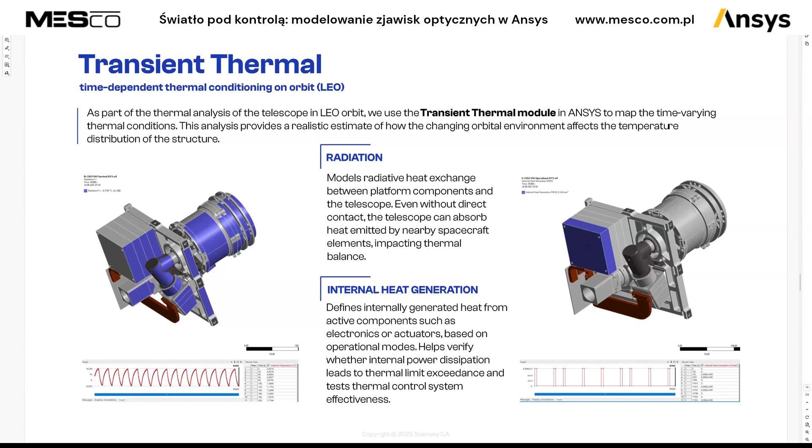simulations in transient thermal conditions help us optimize the design to keep those tolerances together with the PID controller that provides us signals for active thermal control. This is a great help for us when providing the control signals for the actual heaters and designing the exact positions of the heating elements and temperature probes.

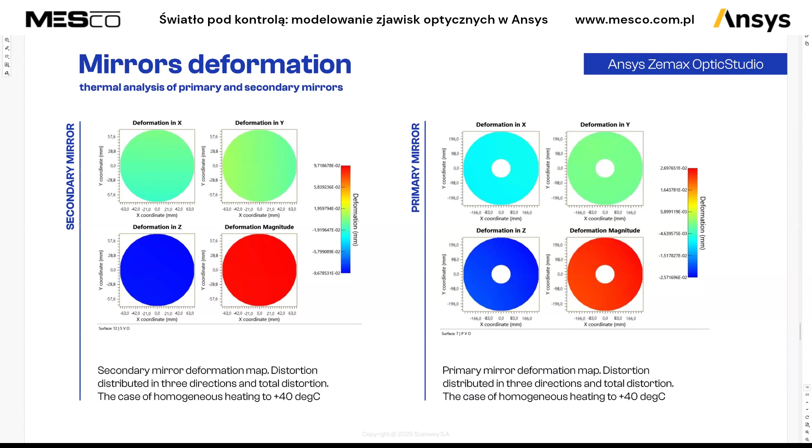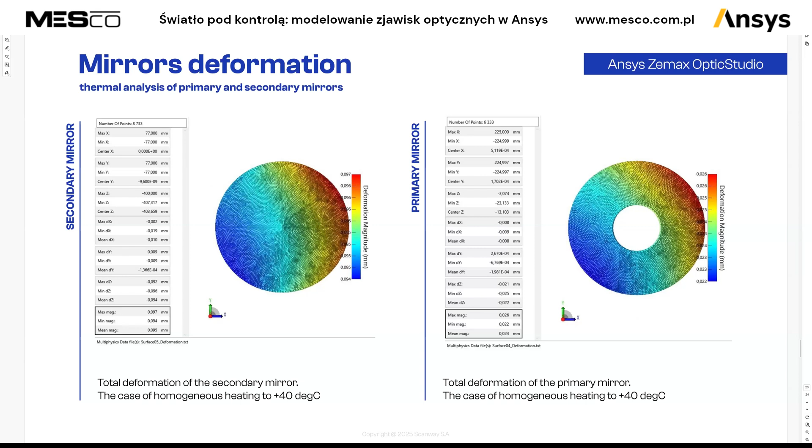Also, we're using the STAR module to analyze how the individual optical elements are deformed when thermal characteristics of the telescopes are taken into account. So we're modeling the primary optical system, then using the thermal simulations and mechanical simulations, we model the deformations of the optical elements, and then back at Zemax, we're assessing the performance of the optical system to know what to expect in given thermal conditions and how to counter it, either by using active thermal control, placing some heat pipes on certain elements, or changing the material and structure overall to get the right performance under the right conditions.

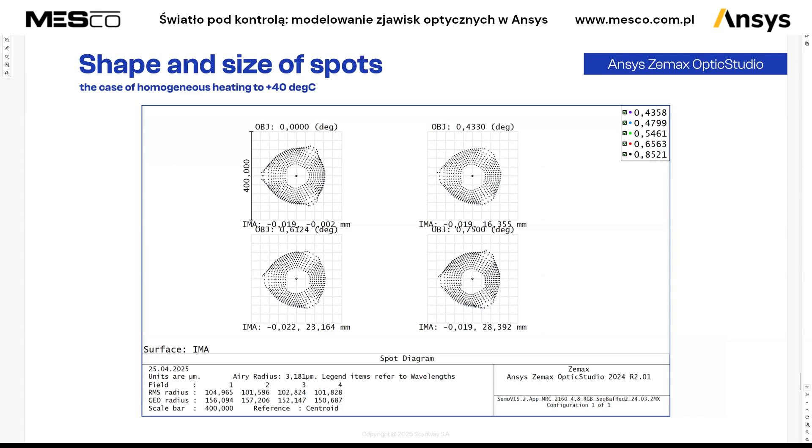This is a visualization of one of our projects.

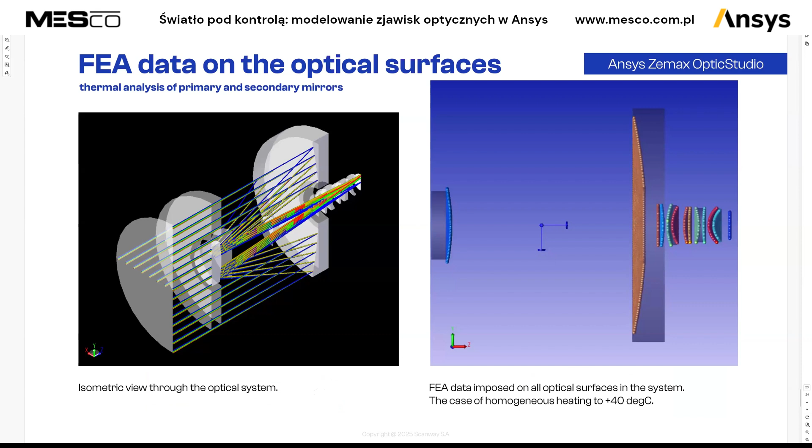The deformed surfaces are then thrown back into Zemax to analyze the actual end performance of the whole system.

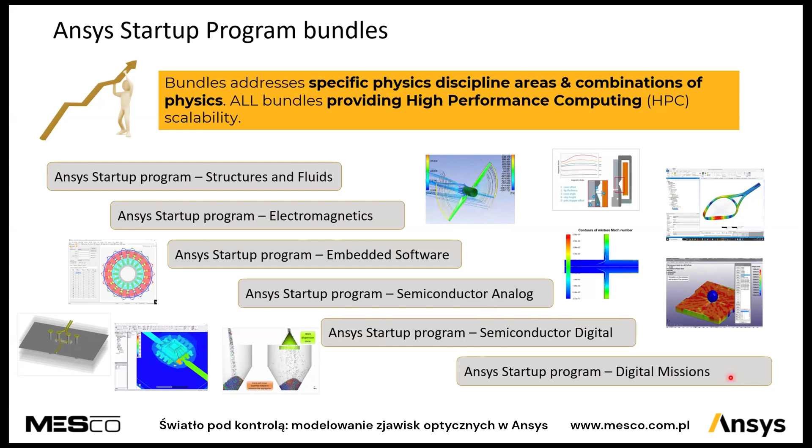And of course, that's why we are showing it: we have a startup bundle for optics and photonics. If you're looking at the challenges, the solutions, and the value of the new product you'd like to start as a startup company, Ansys can help you start your business and reduce your risk by providing a complete package inside optics and photonics.

That means you will have access to the full usage of Lumerical. On the nanoscale level, you get 2 seats of Lumerical Enterprise, providing the complete package we introduced before. You can do FDTD simulation, mode simulation, multiphysics simulation, and interconnect photonic integrated circuit simulation, for 2 seats. This includes the so-called Lumerical HPC packages to use GPU and HPC performance.

We are providing 2 seats of Zemax Enterprise, including the multiphysics STAR module, which is, for example, mandatory for a company like Scanway on a commercial level to validate thermal effects on optical performance. You get 2 full access seats of Zemax, providing all released features.

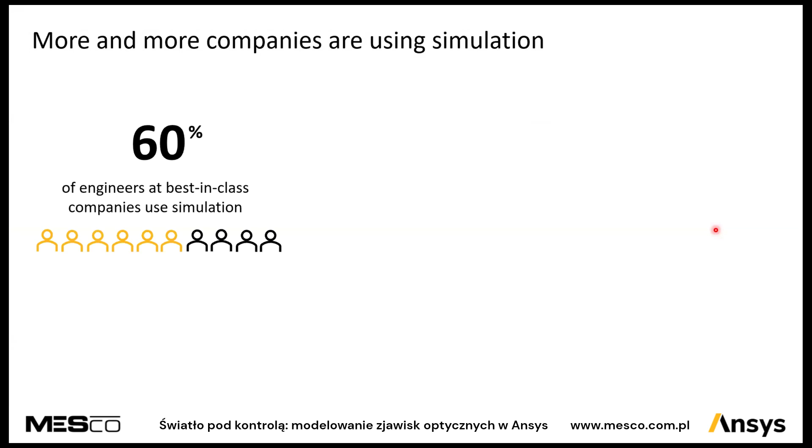At this moment, around 60% of all engineers working for our best-in-class companies using simulation have to touch an optical simulation, a structural simulation, or a CAD design tool. That's 60% for all engineers using software.

In the past, around 2005, roughly 1 of 22 engineers were focused on simulation. In 2020, 1 of 5 engineers used or needed to work on simulation. In the future, we expect that roughly all engineers working on product design and optimization will need simulation, meaning the need for simulation will increase massively over the next years.

Students of today need to become skilled and taught on simulation because it's mandatory, and becoming skilled provides job options. This applies not only to one industry field, but to aerospace and defense, transportation, high-tech, healthcare, industrial equipment, energy, and construction.

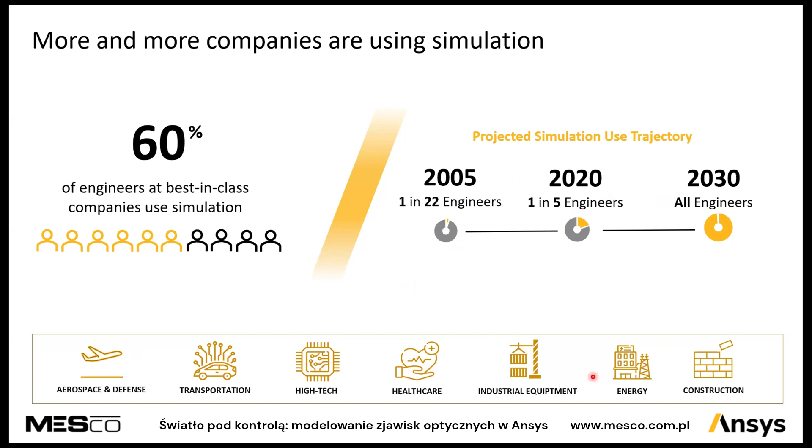Worldwide, everywhere the use of simulation is growing massively. Our partners at the academics level are providing these fundamentals to their students. Looking at curriculum embedment, you can use the Ansys academics program for education.

Or, on the research side, for example by integrating student teams on a specialized real-life project, using the software to design a sports car and then test it on the track against each other in the student program. Because we provide this Ansys academic program, we give students, educators, and researchers access to all the industrial leading simulation we discussed before.

It's restricted to non-profit education and researchers. Such understanding and usage of simulation helps universities keep students focused. Student software helps students understand the theoretical lessons through simulation, because software can help keep students motivated, stay focused, and understand lessons by recapitulating with a software.

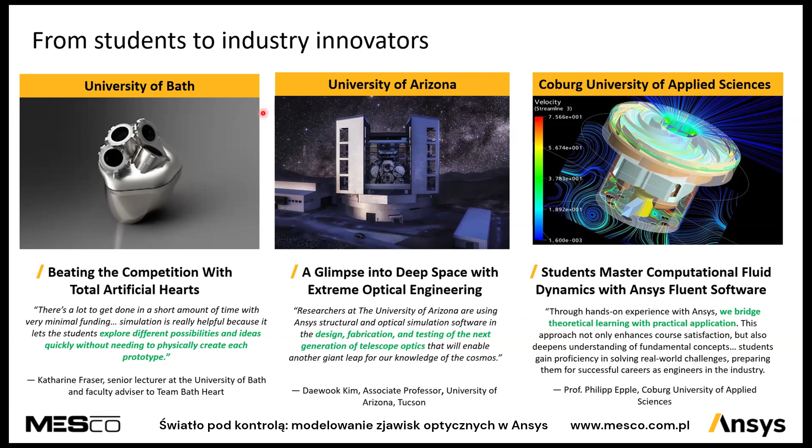So, all students in the audience, if you are a student at a registered university in cooperation with Ansys and MESCO, you are able to download free student licenses, for example also for SPEOS. You can search for the Ansys student free product download, and this Ansys student download provides Ansys SPEOS for free as a student.

If you're looking at Zemax optical design, you can start this year a student download for Ansys Zemax, limited to the sequential mode, but you can test and play for your student projects, documentation, bachelor or master thesis - you can use Zemax as a free download. Your university needs to be a registered account with Ansys and MESCO, and then you'll be able to download. Feel free to visit ansys.com/students, which will guide you to the web page I'll show you again in the next slides.

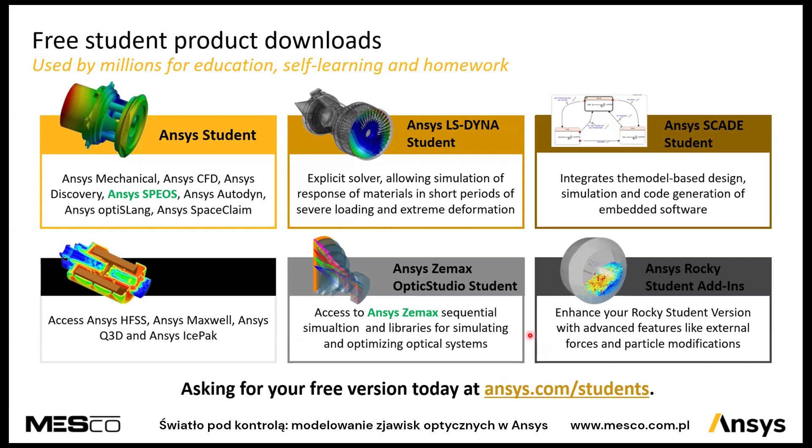So, we are providing Ansys startup, academics, and commercial licenses for commercial usage. Here's how you can find more information.

Your first contact for more information and questions is MESCO. Reach out to them, tell them your question, provide your information, and MESCO will jump in and provide support or a response related to your communication. In case MESCO is not able to solve it because it's a bit more complex, or it's a kind of roadmap for simulation development, they will reach out to us - maybe to me - and from the Ansys side we will provide additional information to give you a response.

We are also providing the so-called Ansys Learning Hub Campus. It's a virtual campus to learn at a self-paced pace the usage of each kind of software we have, because this campus is split across different industry fields. For example, we have optics and photonics, which is now put together. Within that campus license, or Ansys Learning Hub, clicking on optics gives you complete training sessions, learning and understanding and optimizing the usage of SPEOS - from pure understanding of what the software is doing, to interface understanding, to clear, precise feature designs like in SPEOS freeform lens design, like in Zemax, multiphysics validation, or in Lumerical, the multiphysics validation of quantum efficiency of solar cells.